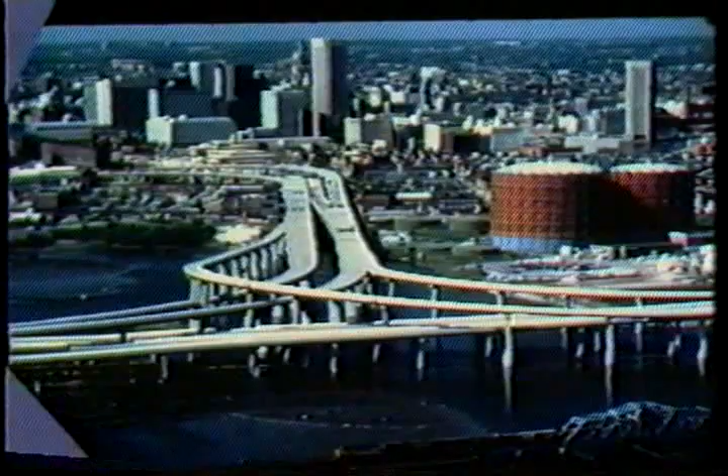Transportation is the lifeline of the American economy. Improvements in transportation of people and goods create beneficial social and economic changes. The cornerstone of the transportation system in this country historically has been the highway network, which contains nearly 4 million miles of streets, roads, and highways. The interstate system is one of the largest public works projects ever undertaken and is estimated to cost $124 billion when the more than 42,500-mile system is completed. More than 97% of the system is now open to traffic.

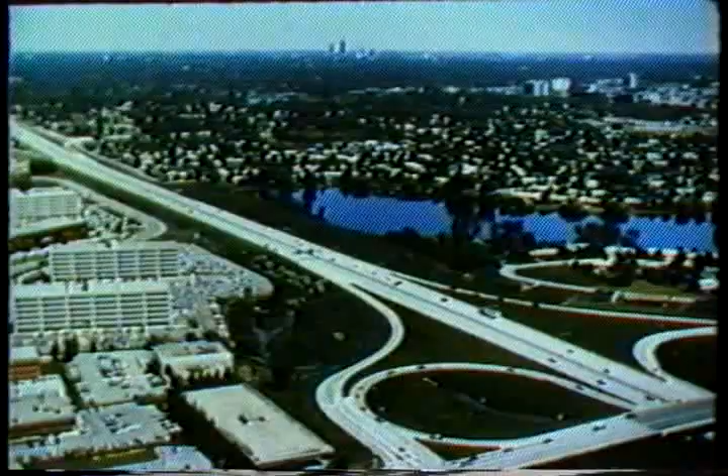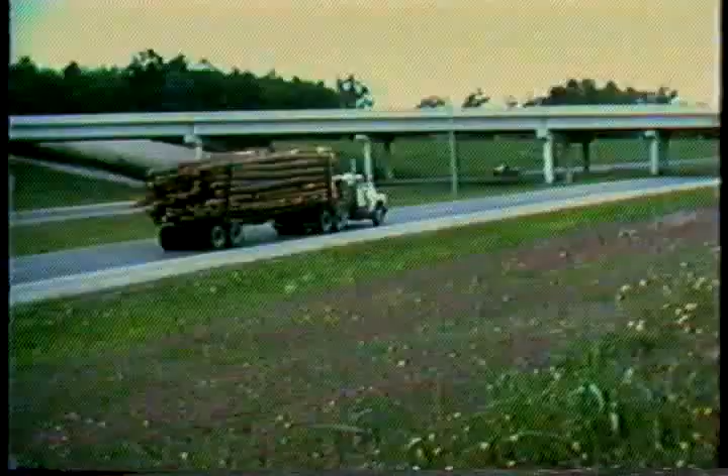The interstate system, while representing only 1% of the highway mileage in the United States, carries 20% of the vehicle miles traveled, as well as 30% of all the truck miles of travel. The importance of the interstate to movement of manufactured goods, commodities, and other products cannot be overstated. In 1985, there were over 370 billion vehicle miles traveled on this system. On rural interstate highways, 17% of the vehicle miles of travel was by tractor semi-trailers or other combination vehicles. Combination vehicles are trucks with double or triple trailers.

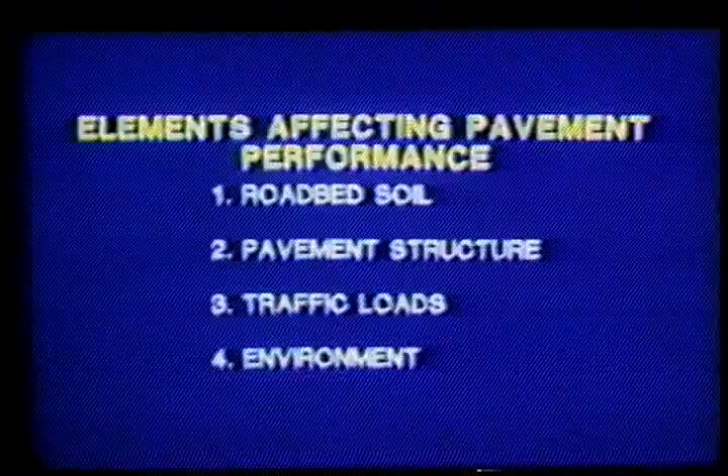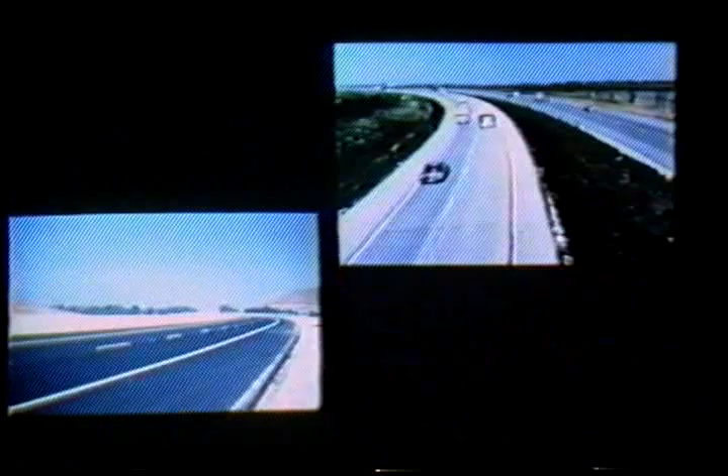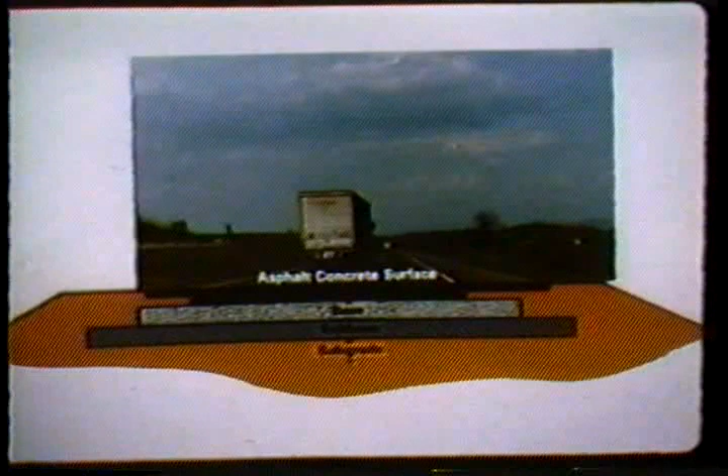4 major elements affect the performance of pavements: the type of underlying soil called the roadbed soil, pavement structure including types of construction materials and their thicknesses, traffic loads, and the environment. Historically, pavements have been divided into 2 broad types: flexible and rigid. Flexible pavements primarily consist of an asphalt surface layer built on an aggregate base and resting on a compacted roadbed soil or on the natural soil foundation. Approximately 24,500 miles, or 58% of the interstate system, are flexible pavements. It should be noted that this information reflects the 1985 surface type and not the materials used in the original pavement construction.

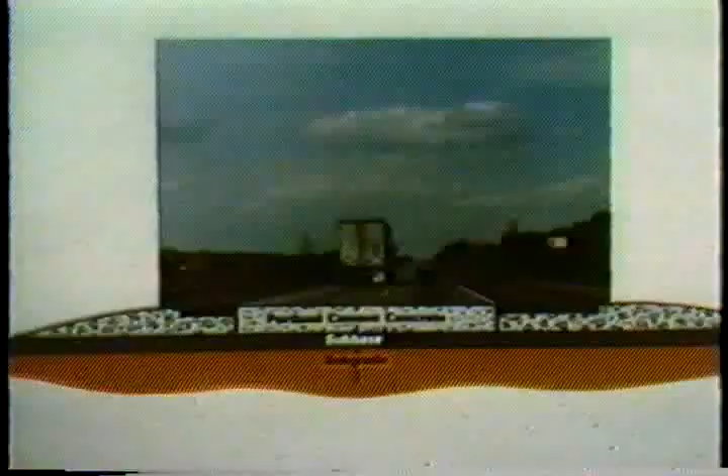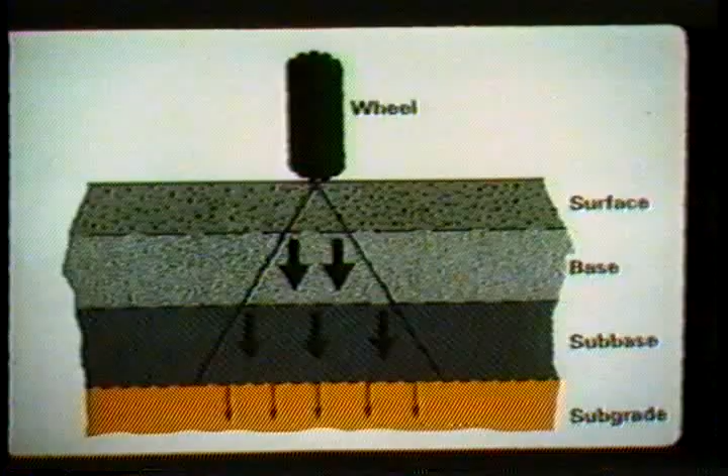Rigid pavements are made of Portland cement concrete placed on a sub-base. Rigid pavements make up approximately 18,000 miles, or 42% of the interstate system now open to traffic. The essential difference between the two pavement types is the manner in which they distribute the load. The material and thickness of each layer of the flexible or asphalt pavement are designed to distribute the load over a larger area. As the load stress is passed from layer to layer down through the pavement structure, it is reduced until each layer can adequately support the applied pressure. A rigid or concrete pavement, on the other hand, functions more like a plank or a slab.

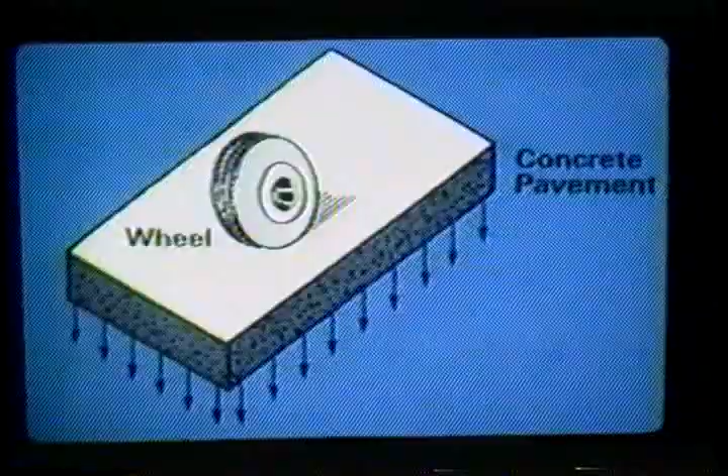Because of its rigidity, a concrete pavement tends to distribute the load over a relatively wide area and does not depend on a series of layers for load distribution. With this background on pavement types, let's discuss the remaining two elements that affect short and long-term pavement performance, that is, traffic loads and the environment. We will discuss the environment first.

Some research groups and transportation industry representatives have argued that the environment is the most important factor causing pavement deterioration. Primarily, this is due to moisture, temperature, and freeze-thaw cycles that pavements are subjected to throughout their design life. These factors create internal stresses and material deterioration, thereby limiting a pavement's life. While the environment causes some pavement deterioration, a greater amount of damage is caused by heavy vehicle traffic.

A recent survey by the Federal Highway Administration has shown that much less pavement deterioration occurs in left lanes on multi-lane highways carrying high percentages of trucks. This finding further substantiates that it is repeated heavy vehicle loadings that are the primary cause of pavement deterioration.

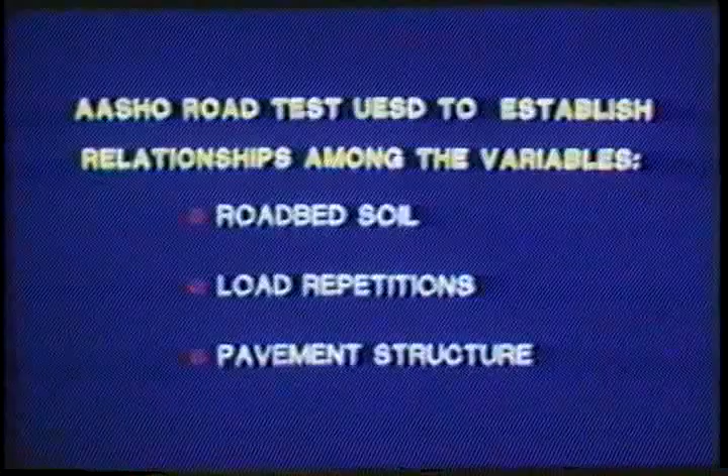Basic relationships for the effects of truck weights on pavements were established at the AASHO road test, which was conducted between 1958 and 1960 in Ottawa, Illinois, at a total cost of $27 million, which is well over $110 million in 1987 dollars. Trucks with known axle weights were driven on sections of road built with various types and thicknesses of construction materials. The road test established relationships among the variables of roadbed soil, load repetitions, and pavement structure.

While the road test was not able to evaluate all the variables in pavement design shown here, still it is the most comprehensive test for pavement design to date. Recently, AASHTO adopted a new guide for the design of pavement structures. This new guide contains significantly improved methods for pavement design and rehabilitation. However, the basic pavement performance concept developed at the road test remains unchanged.

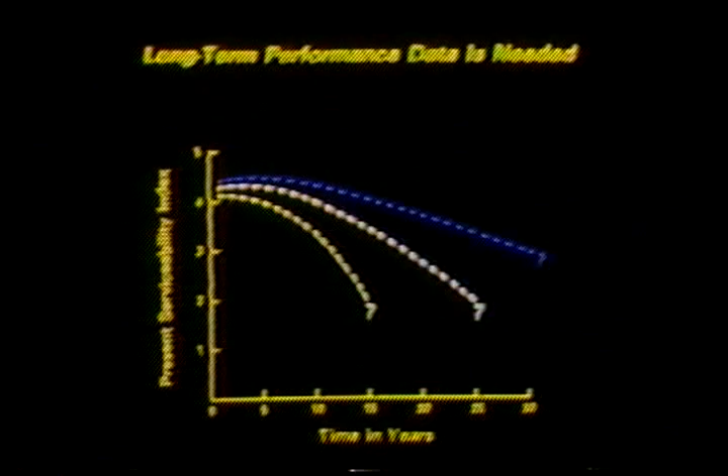For improved design procedures, good long-term pavement performance data are vitally needed. These data will better describe how pavements perform over long periods under a wide range of traffic and environments. In 1986, a long-term pavement performance study was initiated under the Strategic Highway Research Program. The monitoring effort includes approximately 2,500 test sites nationwide. This comprehensive study will enable highway engineers to improve design techniques and better define the relationship between truck loads and environment as they relate to pavement performance.

Now let us discuss how truck weights are considered in pavement design. Many people think that pavements are designed to carry a maximum size load. This stems from the fact that both the federal government and states have established maximum legal loads for highways and bridges. The maximum load is not necessarily the critical load. In design, it is not so much the maximum size load, but the combination of both size and number of loads applied to the pavement that is important. It is both the size and number of loads that determine the rate of pavement deterioration.

While it is true that a single heavy load can cause failure, this load would indeed have to be very large. Pavements generally fail due to repeated applications of loads. This is called fatigue failure and can be illustrated by bending a piece of wire. The wire will endure a certain number of bends before it fails. The same can be said of pavements, namely that they absorb a certain number of bends before they fail.

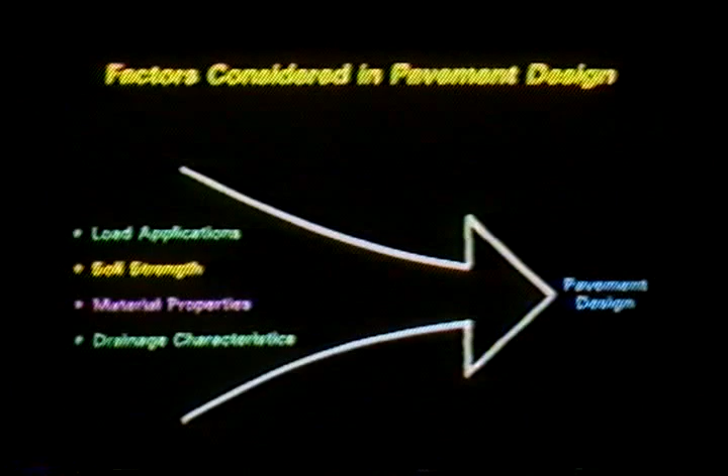The number of applications is combined with other factors such as soil strength, properties of paving material, and drainage characteristics to determine the required design of the pavement structure. The designer utilizes these factors as inputs into established design procedures in order to arrive at the pavement thickness. The importance of accurate cumulative truck weight data in the design process cannot be overemphasized.

We have discussed how vehicle weights are considered in pavement design. Now let's examine in detail how individual vehicle axle weights affect pavements. How much relative damage does an 18,000-pound axle load do? The AASHTO pavement design procedure provides for a load equivalency factor of 1.0 for this load and uses it as a base. All other single, tandem, and tridem axle loads are expressed as factors in relationship to this common denominator.

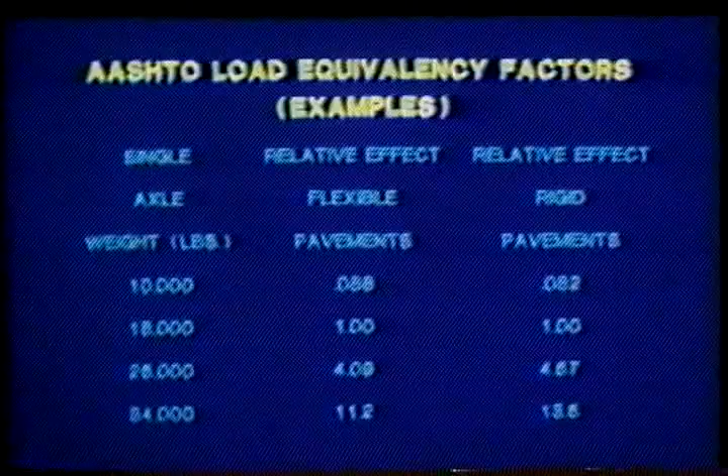Analysis of AASHTO data indicated that if a single axle load is doubled from 18,000 pounds to 36,000 pounds, the damage will increase from 1.0 to 17.12. That is to say, one pass of a single axle loaded to 36,000 pounds consumes as much of the pavement's design life as 17 passes of a single axle loaded to 18,000 pounds. Therefore, damage increases in much greater proportion than the increase in weight.

The 1974 Highway Act raised the single axle maximum weight limit from 18,000 pounds to 20,000 pounds, the tandem axle weight limit from 32,000 to 34,000 pounds, and established a maximum gross weight limit of 80,000 pounds. Let's take a look at what impacts this has on the roadway.

When the average single axle load increases from 18,000 pounds to 20,000 pounds, the damage increases from 1.0 to 1.57. That is to say, one pass of a single axle loaded to 20,000 pounds consumes over 50% more of the pavement life than one pass of a single axle loaded to 18,000 pounds.

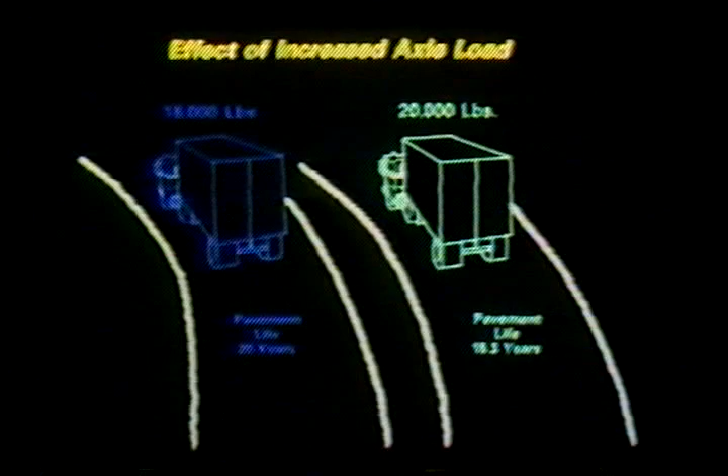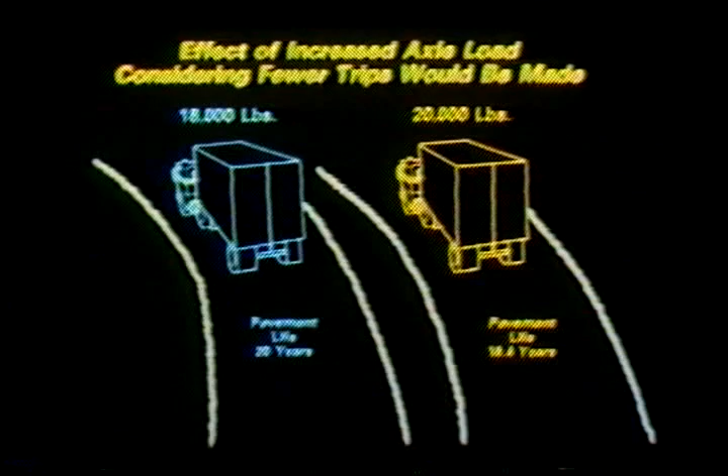This means that a pavement designed to absorb 10 million applications of an 18,000-pound equivalent single axle load over a 20-year period would wear out in 15.3 years with the application of 10 million 20,000-pound axle loads. If you take into account that the same amount of goods could be moved in fewer trucks with 20,000-pound axle loads, the increased axle loads would cause the pavement to wear out in 16.4 years.

Also note that most of our highways were built to the 1956 limit, and weight increases of 1974 are contributing to their accelerated deterioration. The Surface Transportation Assistance Act of 1982 also had an effect on pavements by increasing the allowable length and width of truck trailers. The increased trailer volume allows more cargo to be hauled, and thus heavier axle loads to be applied to the pavements. It is these heavier axle loads, as well as number of loads, that are of concern to pavement engineers.

Several bills have been introduced in Congress over the last few years that would result in an increase in average truck axle weight. One such proposal calls for removing the vehicle maximum weight limit of 80,000 pounds and letting legal axle weight limits control. Let's look at the effects of removing the maximum weight limit. First, there will be increased use of a new generation of trucks. The 1982 Surface Transportation Assistance Act allows tractors with two 28-foot trailers, called Western doubles, to operate on all interstate highways and some primary highways.

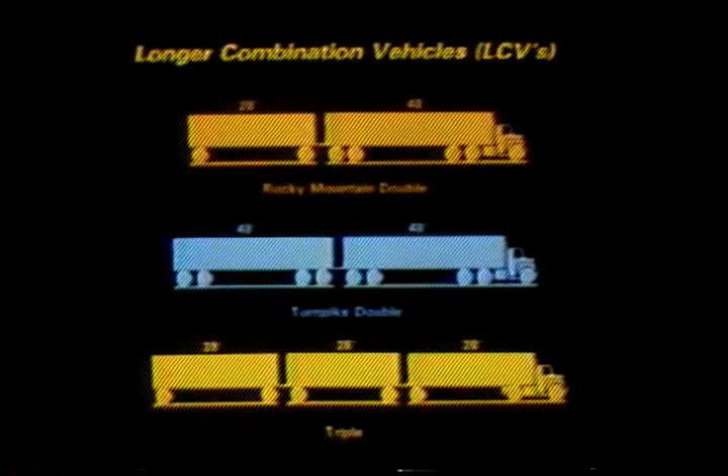Longer combination vehicles, or LCVs, which can now operate in certain states, will be used more frequently if the weight cap is removed. These LCVs include the Rocky Mountain Double, the Turnpike Double, and the Triple shown here. One way to illustrate the damage done by the various truck configurations is to determine the number of 18,000-pound equivalent single-axle loads, or ESALs, each truck type applies to the pavement to carry 1,000 tons of cargo. Of course, this will require several trips by each type of truck.

It is assumed that the gross weight cap of 80,000 pounds has been removed, and trucks are loaded to their highest practical operating weight. The use of Western doubles with their single axles applies the most number of ESALs, that is, 175 for each 1,000 tons of goods moved. The use of triples applies 163 ESALs. The use of Rocky Mountain doubles applies 144 ESALs. The use of conventional tractor semi-trailers applies 134 ESALs, while using turnpike doubles applies 80 ESALs. In other words, different truck configurations cause varying levels of pavement damage while carrying the same amount of cargo.

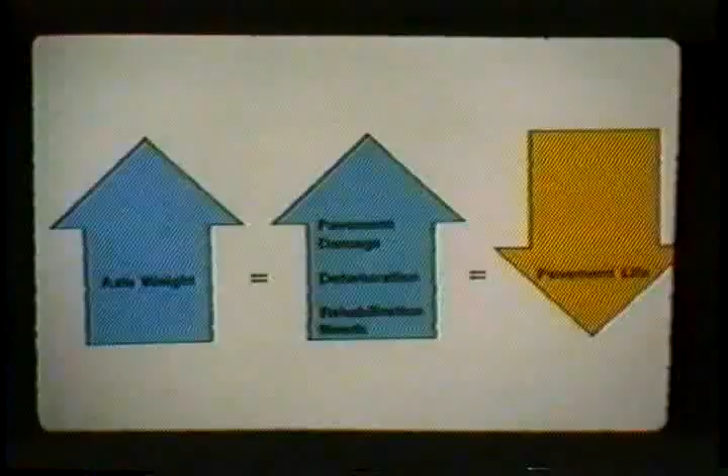The importance of accurate truck weight data in pavement design has been discussed. Also, the large impact of increased truck size and weight has been illustrated. From this discussion, it is apparent that the strict enforcement of the congressionally mandated weight limits on the interstate system is essential in order to preserve the pavements. The important point to remember is that even if all other factors remain the same, as axle weight increases, the amount of pavement damage also increases, and the expected pavement life decreases. This resultant pavement deterioration substantially increases the need for additional rehabilitation funds.

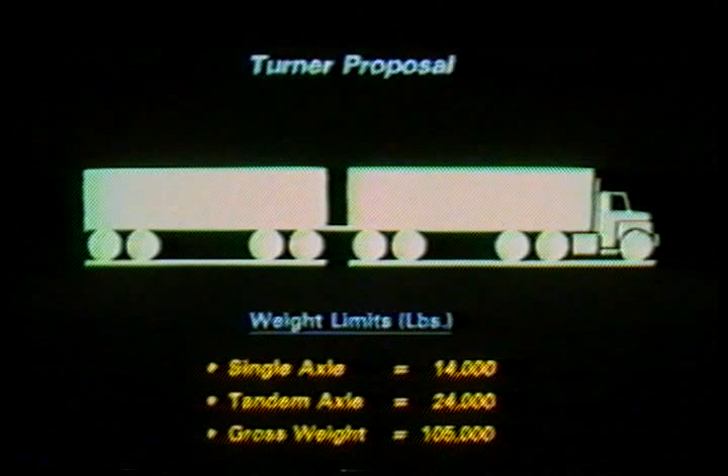Realizing the potential damage to the nation's highway system caused by increased axle weights, former Federal Highway Administrator Frank Turner has proposed a new generation of truck that would cause less pavement damage by controlling axle weight while allowing heavier gross loads. Under the Turner proposal, the single axle maximum load would be reduced from 20,000 pounds to 14,000 pounds, and the tandem axle limit would be reduced from 34,000 pounds to 24,000 pounds. The vehicle gross weight would, however, be allowed to increase from 80,000 pounds to 105,000 pounds. The number of ESALs applied to the pavement to move 1,000 tons of cargo would be reduced to 40. This is more than 3 times fewer ESALs than for the conventional tractor semi-trailer to move the same amount of goods.

By the way, the Transportation Research Board conducted a preliminary study of this proposal. This study estimates that allowing truckers to exceed the 80,000-pound gross weight limit while reducing axle loads as indicated in the Turner proposal would result in $250 million reduced pavement damage annually. At the same time, it would result in substantial economic benefits to truckers. A more detailed study of this concept is underway. This presentation only discusses how truck size and weight are considered in pavement design. There are several other factors that must also be considered when comparing truck configurations, including economic trade-offs, safety, operational considerations, and the effects on bridges.

The challenge of the future is to reach an equitable balance between reducing the cost of transporting goods and providing safe and cost-effective highways. Transportation costs have been reduced, and this nation's economy has benefited greatly from the improved operating speeds and from increases in the weight limits on the interstate system. Our future policy position on proposed changes to the existing size and weight limits must be based on a careful analysis of the nationwide costs and benefits of the proposed changes, while maintaining responsible stewardship over our highway system.